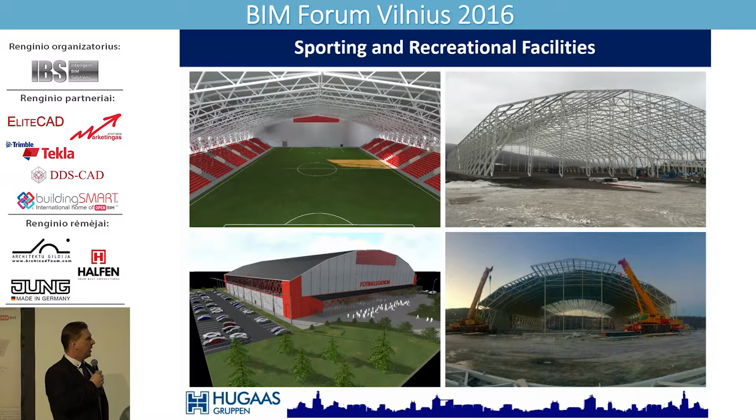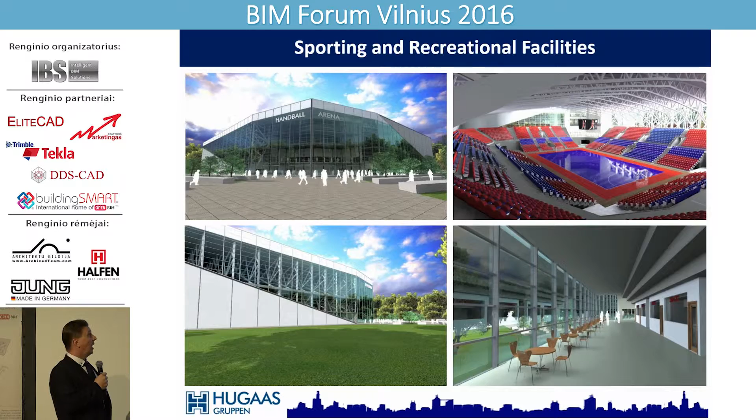Our main area of focus today is sports and recreational facilities. Some of the projects we've been working on look like this - some nice large football stadiums in Norway. Hugaas is also the proud partner of the Norwegian National Handball Association, and also builds other sorts of arenas throughout Norway.

And also now we have very close family links back into Rema 1000, one of the largest shopping chains in Norway, and we're also now starting to build shopping centres as well.

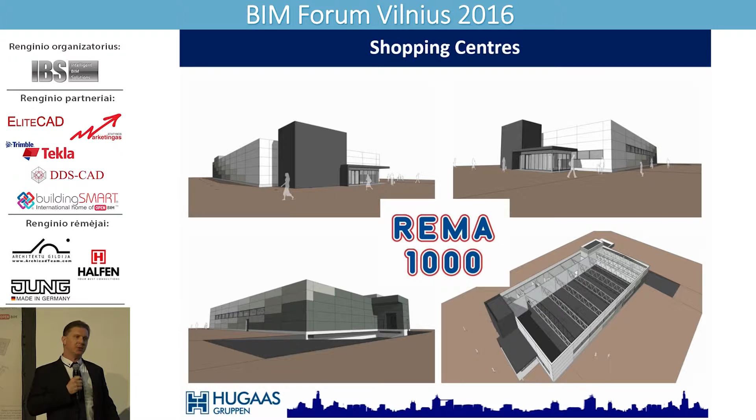So when we look at the overall cycle of BIM, it's a very nice diagram there, Anestis. I'm really happy with this diagram because it really helps me explain how we operate as well.

For our Norwegian projects, we have Hugaas Entreprenør as the general contractor. Hugaas Engineering pretty much goes through and does all the engineering, design, detailing for all of the projects, supporting Hugaas Construction, who is our production company, and supporting also Front Energy and Front Tech, who also do our technical systems and also the maintenance of each of the facilities that we do build as well. As you can see, we have operate and maintain ticked.

So let's have a look at our project. This is Mooja, our new office facility that we are now building in Norway, in Trondheim. It's actually in a little town called Støren, about 45 kilometers south of Trondheim in the center of Norway.

So when we started, we had our owners say, hey, we need an office building. So we did some nice SketchUp concepts, some ArchiCAD pre-design, modeling proposal drawings, budget estimation, and also life cycle value realization, because it's very important to consider the full life cycle of any asset before it's being built. It may be cheaper to build to start off with, but what if it's going to cost more to operate and maintain? So life cycle valuation is very important for us to consider in the early stages.

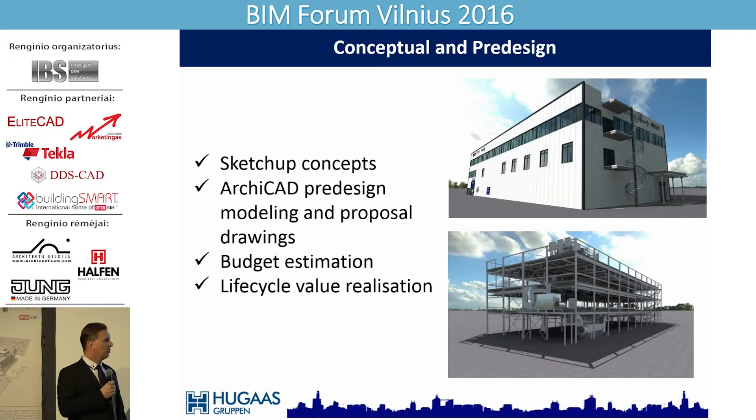We also look at the detailing design. Our engineering team, where I see a number of people sitting here as well, are heavily working in ArchiCAD for the detailing. We do all the design calculations in Dlubal RSTAB, Tekla Steel and Concrete, DDS CAD technical systems. We use BIMSight for clash detection, material lists and takeoffs. So again, we can see the Mooja facility through its various stages that we have here.

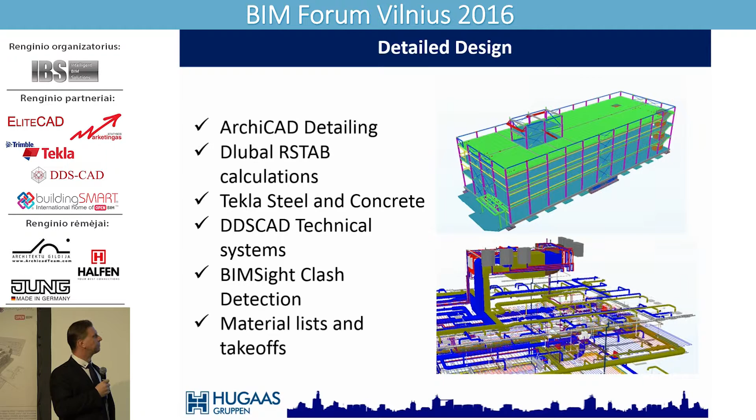Our production facility at the moment is in Gargždai. We have 4 workshops where we're producing all the steel, doing the painting, also all the parts and assembly. We send drawing files to the plasma cutter straight from our BIM model, material order lists, everything directly from all of the detailing that we do in our BIM model.

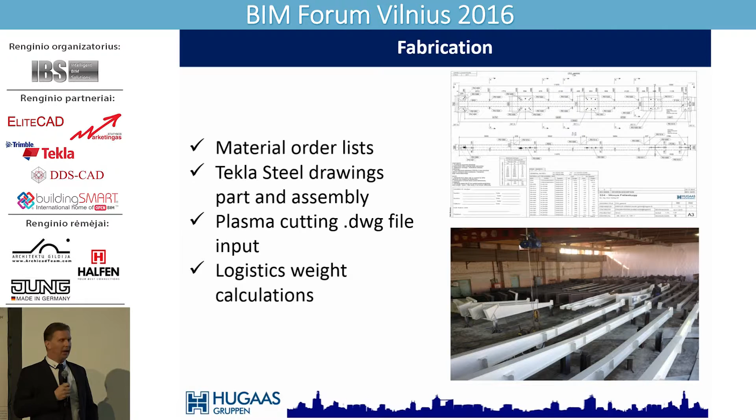Also logistic weight calculations - all the logistics is managed from our Klaipėda office because we're sending a lot of steel to Norway. So you can imagine the amount of freight that it's going to be costing us, and also the amount of journeys that it's been taking. All the drawings come from the office here in Vilnius, straight for production, to produce all the parts and assemble all the steel trusses.

Then we look at construction management.

So again, this is our facility. It's about 65% complete today. This was taken a couple of weeks ago. Still a bit of snow there in Norway, as you can see.

Work estimation, scheduling, work packages. All the work packages have all of the installation drawings, all of the material lists, to give all the workers all the information that they need to produce and build the building, in this case.

And also we use Graphisoft BIMX IFC file. The guys walk around with iPads on site so they can actually walk through the building itself and know exactly where things need to go as well.

Now, the new part, I guess, which might be interesting for a lot of people here. I have a very long, strong background in maintenance, and this is a part that we are also doing. We're using a piece of software called OpenMaint.

So part of the service delivery, once we've completed the building, we need to operate and maintain it. We also provide that service through our group of companies, where we're able to import the BIM model straight from the design into a product such as OpenMaint, where we can then manage the asset inventory, the preventive maintenance, breakdown maintenance, the energy environment, also the inventory, all the spare parts, all the manuals, all the operating instructions that come with the building. They need to go somewhere.

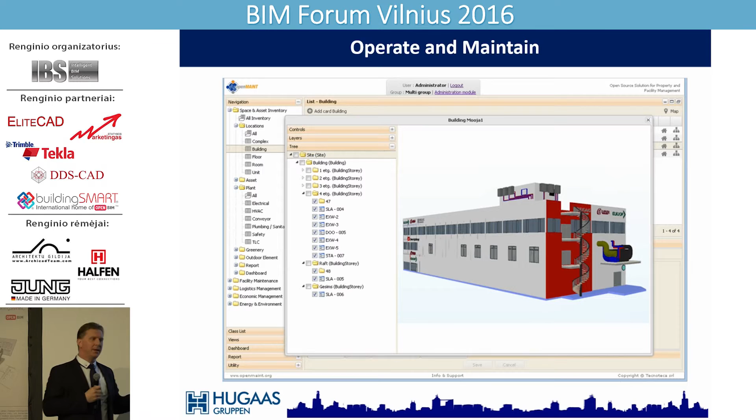So essentially this is how that piece of software looks. We import the BIM model and then we get a full asset hierarchy of assets. So all of the pumps, all of the piping systems, everything comes through to the system, so we can then start to allocate all of the maintenance to the whole building as well.

So for preventive maintenance, very simple. We program all of the tasks in there, the 3 monthly tasks, the 6 monthly tasks, fire inspections, everything like that, and then automatically we send out our maintenance team on a scheduled basis when they need to perform that maintenance, to make sure we don't miss it and also comply with regulations.

So it's very important that we comply with all the statutory laws and regulations in Norway. They go through, maintain the facility, and then the history is captured back.

Very similar in a breakdown scenario. When something does go wrong in the building, we go through to our call centre, a call gets logged, the information gets logged into the maintenance system, and then it gets sent to a phone to the workers. A work order is raised, and then again they go and make a repair to the building, whether it's a light fixture or some more serious maintenance that needs to be performed.

So essentially, the operate and maintain part is often a part that's overlooked. Most of our clients have been asking for this service for many years now, and it's something we've just recently introduced, mainly because of the requirement that it's very important to meet audit and compliance.

We can look at loss prevention, 5 S's. People probably have heard of this. Asset history analysis. We also look at inventory management. Also looking at our budget, cost, managing the finance over the next 10, 20, 30 years after the asset has been built.